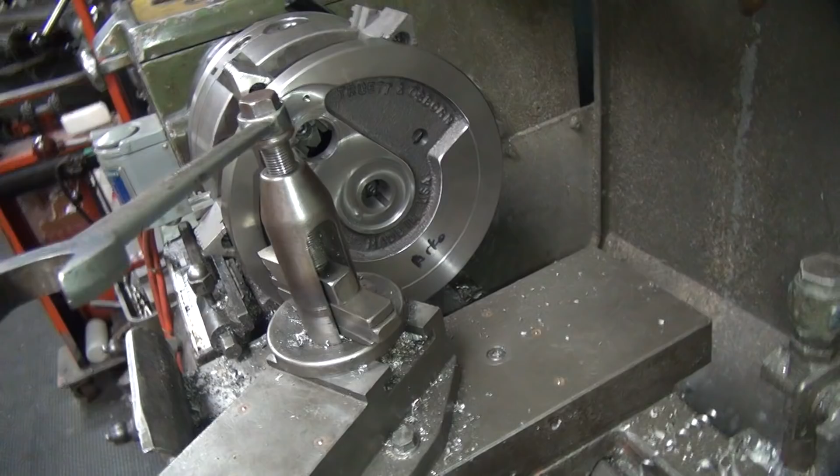Alright, working on these Stroker 45 motor here again. This is Mike's flywheel. So I just got done cutting the washer hole out in here.

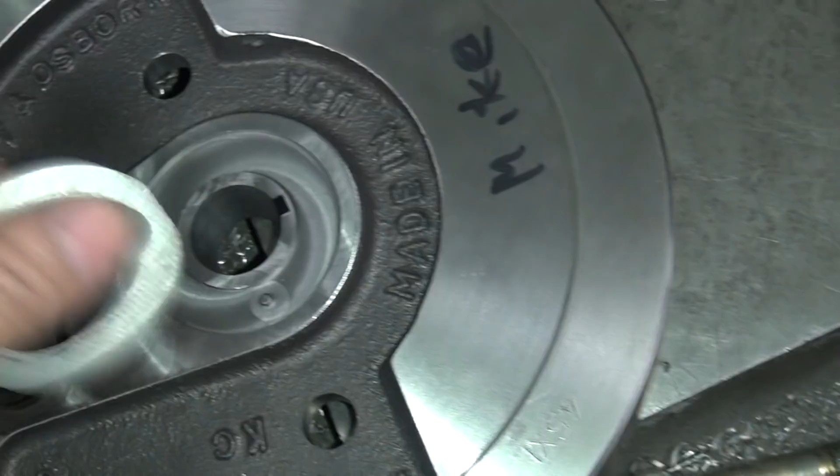So here is the uncut one. This is where the stock Harley thrust washer goes to. So this is the one we're putting in there. And as you can see, it doesn't quite fit. So it's a little bit too big, so I can open them up a little bit. So that's what we're doing over here.

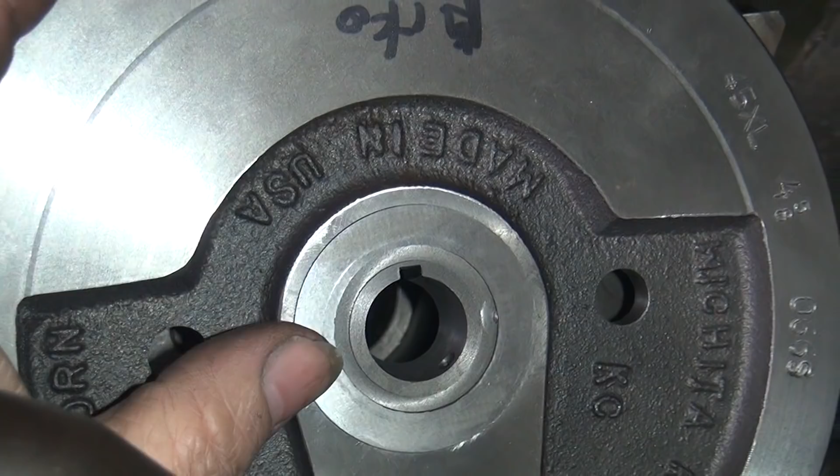Now, we still got to deal with the dowel pinhole I haven't put in here yet, but anyway, that goes right in there like that. So it fits up in there now. Only got about 2 thou clearance on this. It's trying to go in there, but not quite because the washer's little dowel pin is in the way.

So I'm going to have to put the dowel pin in these holes, into these washers, which are heat treated. So I have to use a carbide drill. That ought to be fun. That'll be the next thing to figure out how to do.

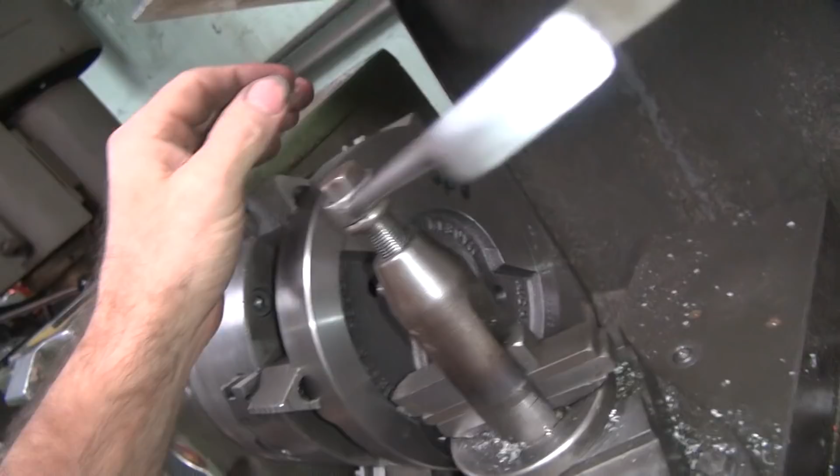So yeah, that's it, this one's all done. So we're going to go ahead and do another one now, so you can see how we do it.

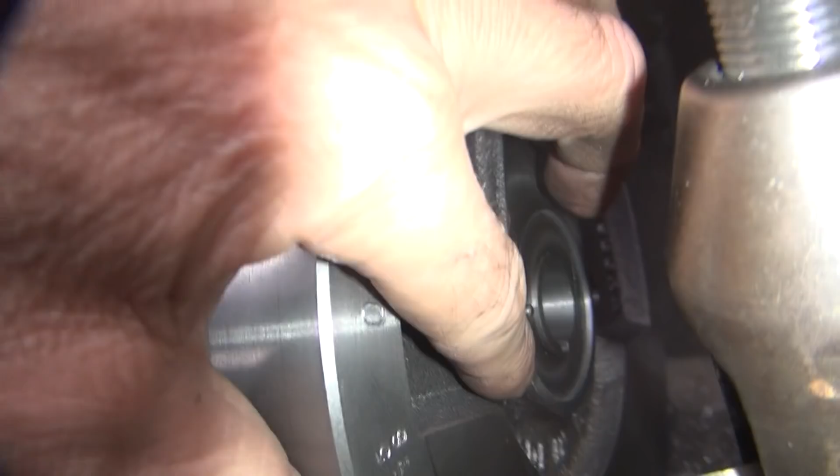This is our depth stop down here. And this here is the special bit I ground that gets me up in there inside that hole where it's real nice and tight. You got to have it undercut here to clear the diameter of the cut in there. It's hard to see it, but anyway, the cutter has to clear that diameter.

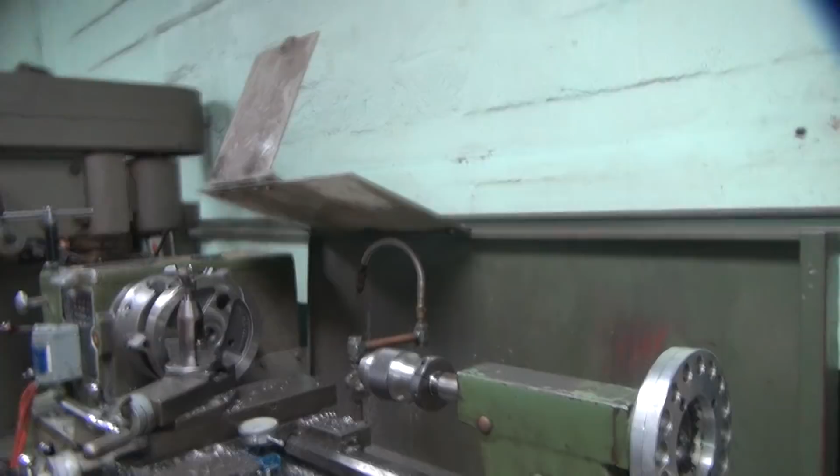So anyway, it's all fun stuff you get to play with. You have to make everything. What else is new?

Okay, so I'm going to try not to disturb the setup here too much. Get this out of the way so I have room to work.

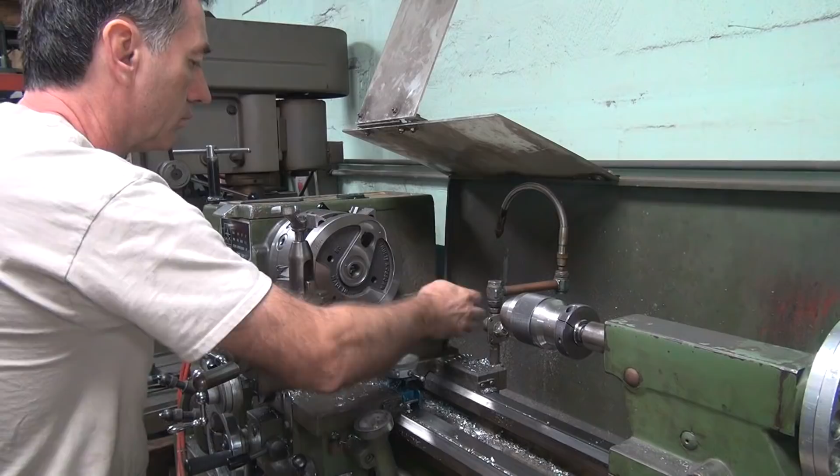Alright. Now I'm using a 6-jaw chuck. This jaw doesn't do anything, it's not hitting on the flywheel. The other 5 are doing something now.

The right direction would help. Alright, one down.

Use a lead hammer to just knock it in flat. It's basically a dead blow type thing with a lot of mass behind it. That's why the lead works so good. Looks good on a lot of things.

Okay, we use our dial indicator here to make sure this thing is straight. Appears to be nice and round, or concentric I should say.

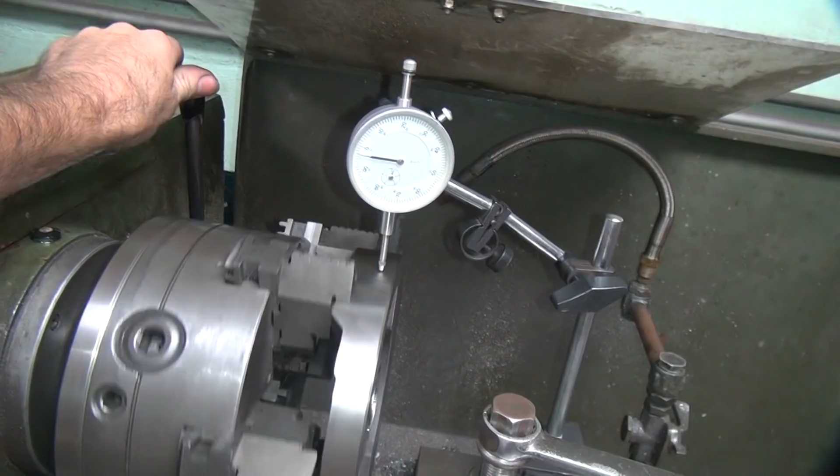Okay, the needle right here is not moving, not much anyway. It's at about 3/4 of a thou. I had to recenter up my chuck jaw to make that do that, on my chuck. I have a chuck you can move side to side. It was 10 thou out when we started with the other wheel.

Alright, side to side is usually within about 1. That's what we had before, so I'm going to check it again. You can just eyeball it to see it's not wobbling around, so that's close enough usually, just for this application.

Okay, now we can move this all the way in here. We'll redo this.

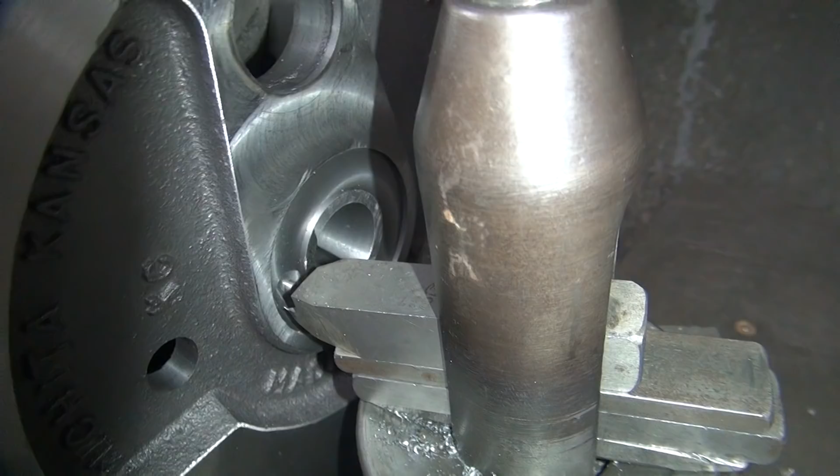Alright, so the fun part about this deal was you have to clear the dowel pin. It comes around right like that, and it goes clunk right into your cutter. So you have minimum clearances in there.

So I go into, that should be close to 0 if the flywheels are the same. So you can see how close the dowel pin is. I purposely cut the cutter really thin, so I actually have quite a bit of clearance.

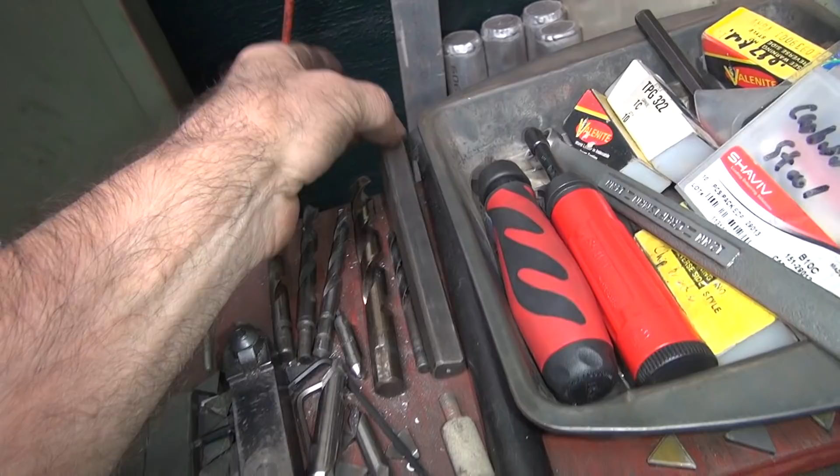But that is a problem. If I just use a regular boring bar, like one of these, that dowel pin will go clunk right up against this thing and destroy it. Or it'd cut the dowel pin off. If those are soft, it'd cut it off. If they're heat treated, it would break this, and screw up the dowel pin and the flywheel.

So that's what we had to do. Okay, so now we'll make sure everything clears, which it seems to. Okay, we move this in here until it touches. You'll hear it.

Okay, looks like we hit right there, about one under like before. I hear it hitting. Now we're cutting the washer, it's bigger now. So we're at 30.

Each line is 2 thou. That was 10, 20, 30, 40. We feed it out.

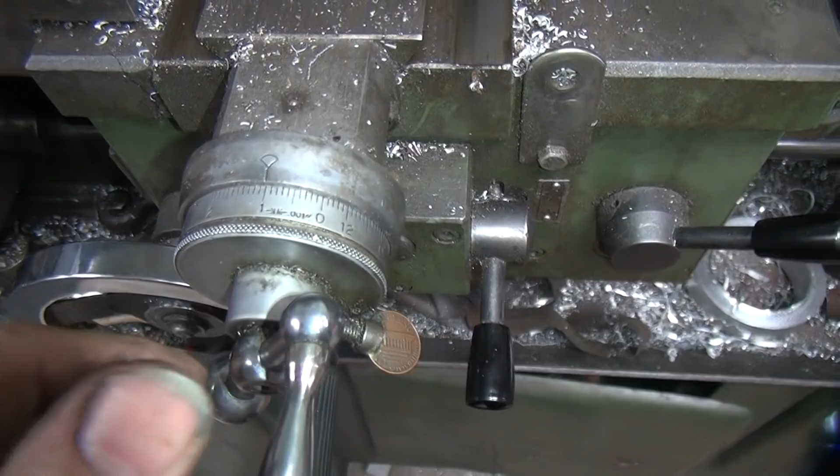Got that far. Alright, so now we got to run number 1 this time. Before I was going to, should have been about 0, but I went a little bit past. Things keep moving a little bit. Okay, get this out of the way. Crank, crank, crank, crank. You get room in there to get with your caliper and measure it.

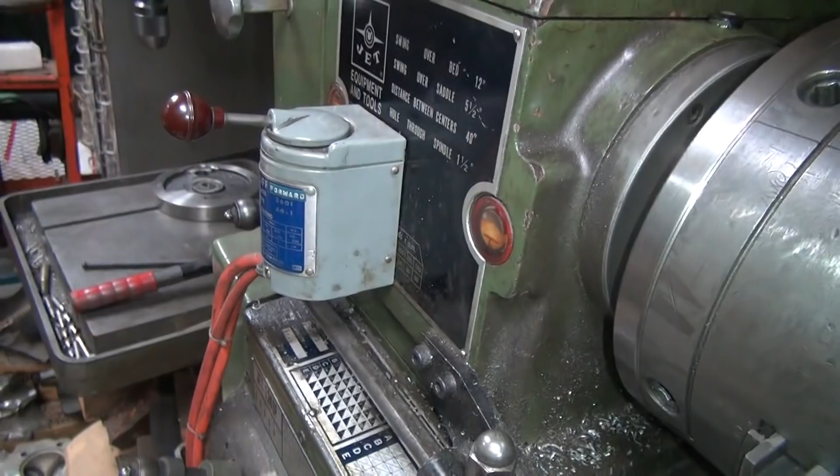Let's see what we got. We're at 2 inches and 6 thousandths. There's 7 thousandths. Okay, you can see that little mark there where I just cut. It's on the outside edge there, about 70 or 80 thou right there.

That's where we just opened it up. Okay, so the washer is 2048 to 2050. We're at 6 or 7. So theoretically, we have another 40 thousandths to go, a little extra. That'd be more than we had over here before.

Okay, get that in there. Make sure you do clear the dowel pin before you come in. We know this little past 0 is where you hit. Turn the wheel off. Okay, make sure the dowel pin clears right there. We are, so we're good rotation.

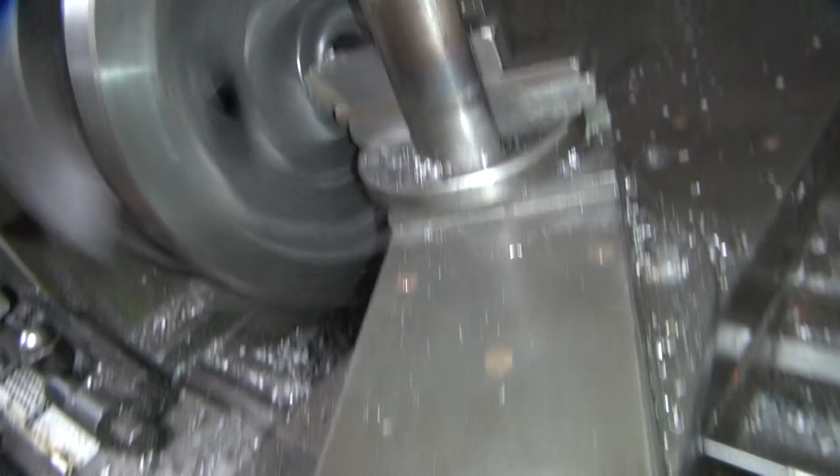We'll go 1 under on the dial right there. Let's see what it cuts at this time. We were at 1 before. Yeah, it's repeating this time.

Okay, so we needed how much? 20? No, we needed a lot. Yeah, I lost track. 50, I think. 20. Theoretically, we're at 30.

Everything out. Let's go measure what we got. It's a good thing we didn't go any extra. We're at 48. 49. That's the same thing I did on the last one.

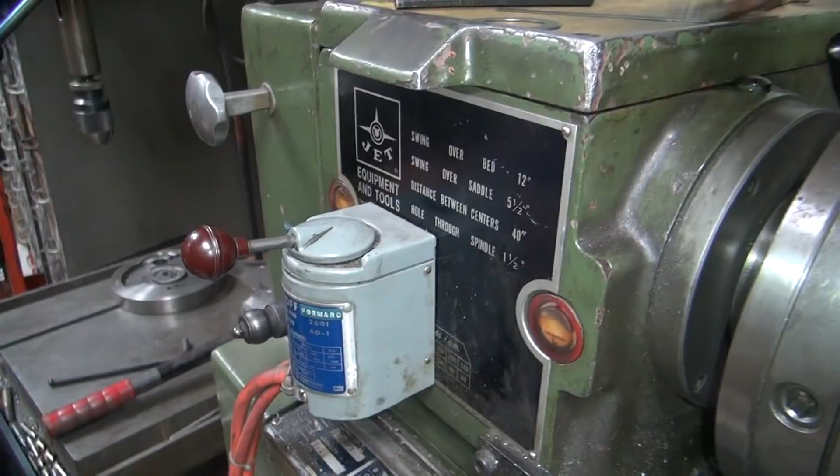It's at 49, and I wanted 50. To get 50, I took 2.5 out. Okay, this time we were at 5 under.

So this lathe does not repeat on these numbers, which is kind of disappointing. Because it means I can't use it. My guess is this cross slide's moving around a little bit each time I do this. Okay, we should clear. We're good.

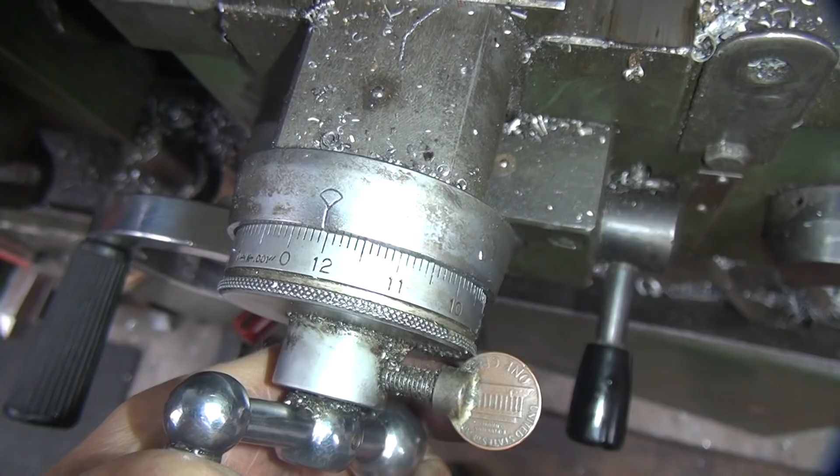1 under. Zero. That's where I went to before. Theoretically, that should be around about 1 thou. I'm going to give it the whole. It's exactly the same number I had before.

See it's cutting. Looks like it cut a couple thou. Yeah, we'll see if it cut a couple thou again. We're not cutting no more, so I'm going to run this thing way out.

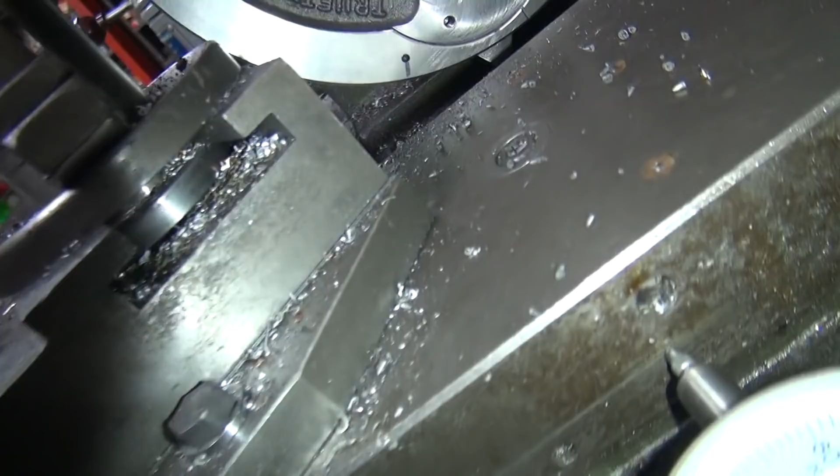Alright, turn that off. Give it a blow job, high pressure. Alright, let's go see what we got here.

50.5. Good. Oh, there's the 51. I was shooting for 50.5. Yeah, this caliper sets a little bit off on the OD. I think they're off by 1 thou. So actually, 51 should be about 50. Okay, so I think we're good on that.

The washer is 48, as I recall on this washer. And it appears to be fitting in the holder. It's supposed to, minus the dowel pin, of course. Alright, so there's another wheel done. Now I gotta deburr it though, because I hate burrs. Burrs are bad, we do not like burrs around here.

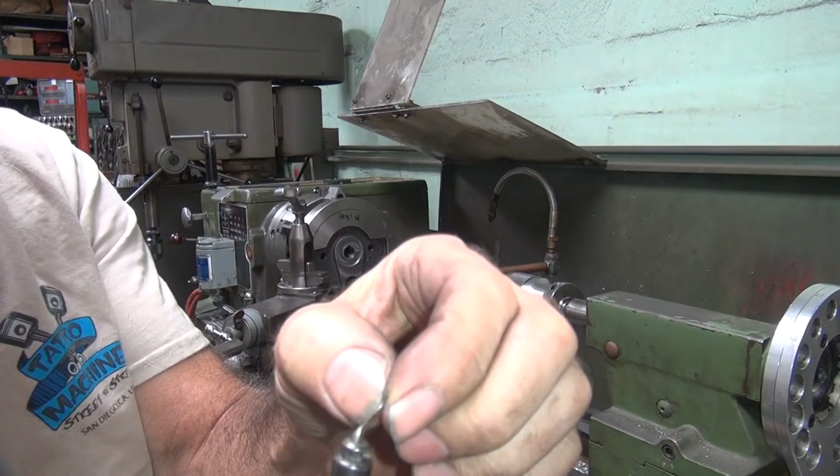Alright, so I'll use this one here because this one's ground right to the point, right up to the tip. This one here, Fancy Nancy one, it's radiused all the way down, so the first 1/16 of an inch doesn't do anything. So I use my modified one, which is dull.

One deburred edge. Can't have any burrs on anything I do. Cut me. So you see a little shiny mark right there in the corner. Right there, that would be our deburr. This line that's coming out right here is what we just cut. So that's how much bigger we made it, roughly. Alright, so now that has been modified.

Okay, grab our tools here. Okay, so now we can see a little bit better what's going on.

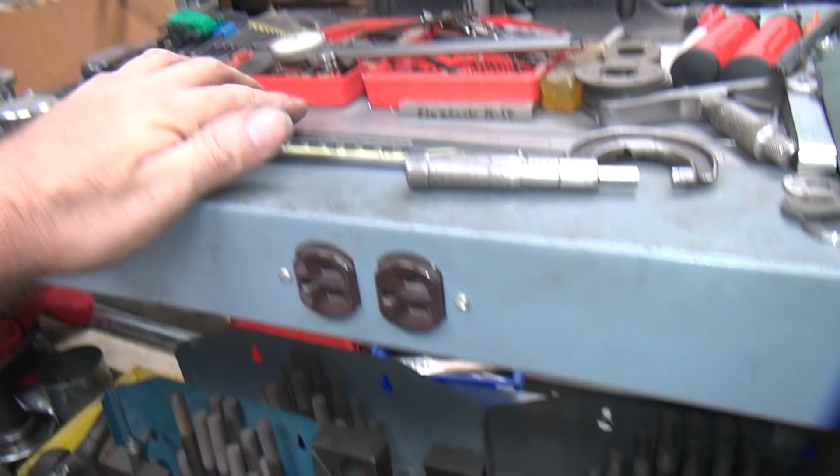I kind of got an idea what I'm going to do. Basically going to use the milling machine over here. We're going to dial indicate in the center of this, move over here and measure what the center line dimension is exactly on center to what that is. I can roughly tell what it is with a scale, which is over here right now.

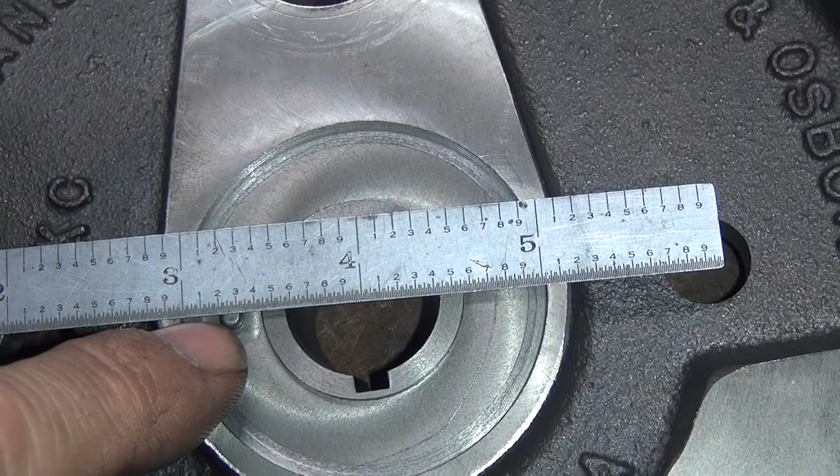So if you take that and put it right in the middle, and look over here where the dimension is at, you can see from the 4 to here looks like about 730 thousandths, roughly.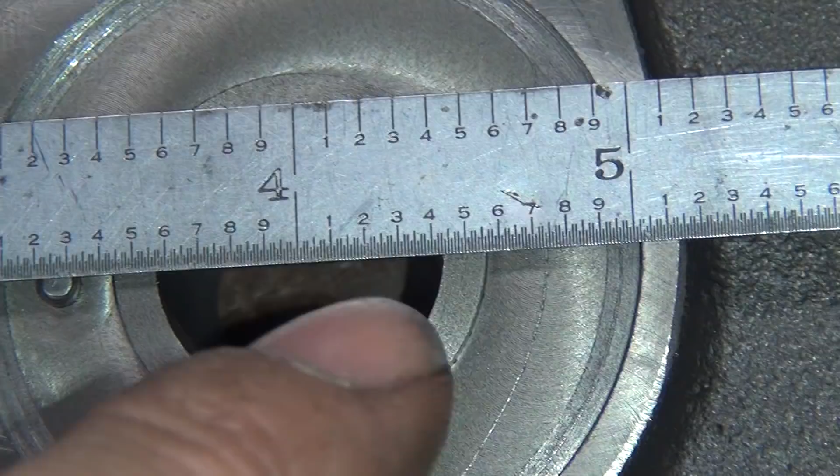Now to make sure this is on center, you look at both sides here. See, it's 4 plus a little bit, 4 plus a little bit. Looks like I'm maybe slightly more to the right here, which will give me about 5 more thou over here. So maybe around 740 then instead of 730, 735. But it's not 3/4 — 3/4 would be 750. That'd be too easy. That's why we're going to actually measure it in the real world.

Then I'll go ahead and put this into the mill and somehow hold this, probably just using a 3-jaw chuck would be my guess. Then I'll have to indicate the center of the hole, which will put me on center again. And then I just move the mill over and poke the hole.

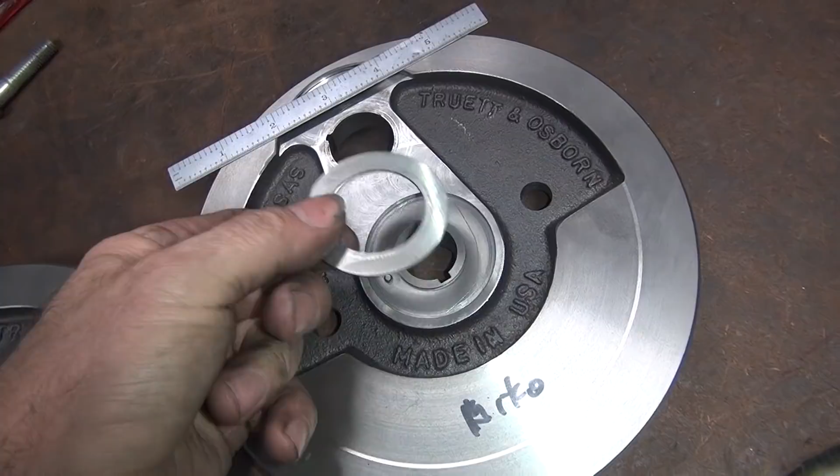I'll have to find me something hard, carbide, some type — something I want to destroy. Because it probably won't be too happy drilling through heat-treated washers. But anyway, that'll be something I'll have to figure out.

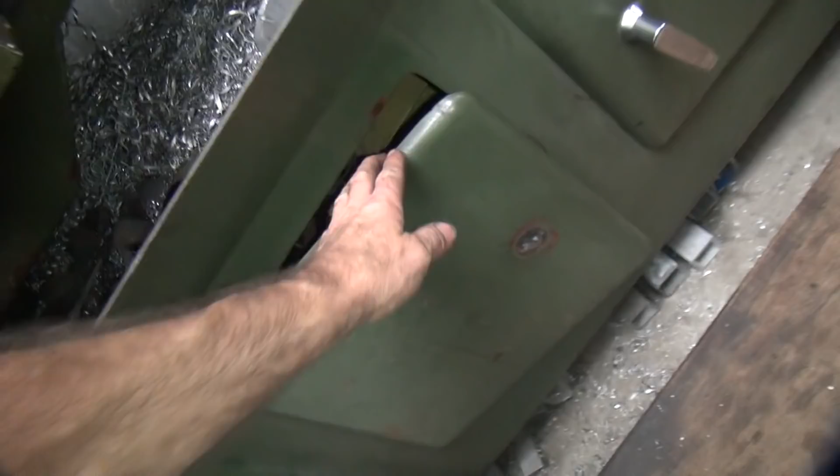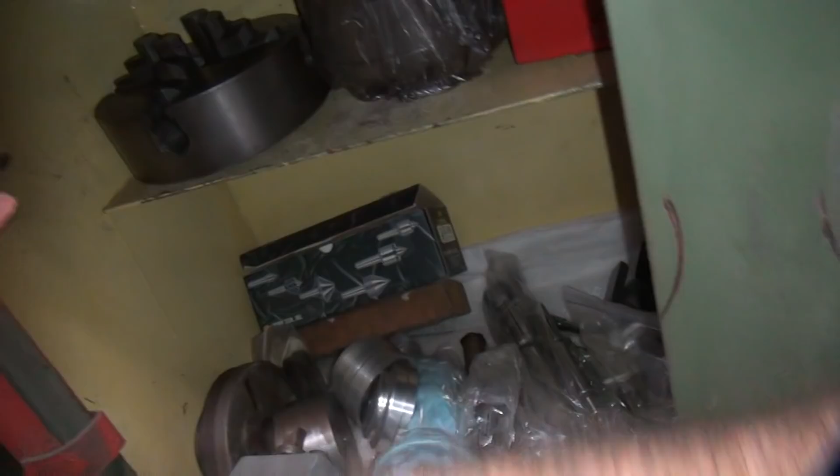So I'll have to go find me a drill chuck to use. I got a pretty good idea where one's at, right over here. Yeah, there's probably one floating around down here somewhere. I used to have a small one. I don't see it right now. It's buried in here somewhere. Yep, it disappeared. Or it's buried where we can't see it.

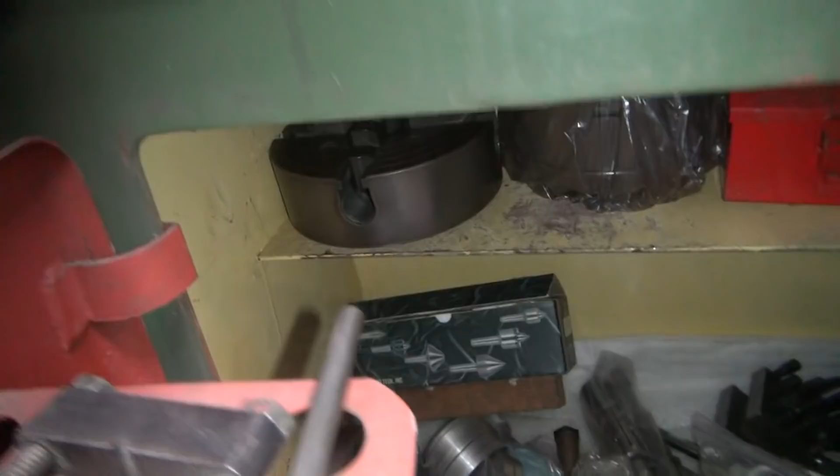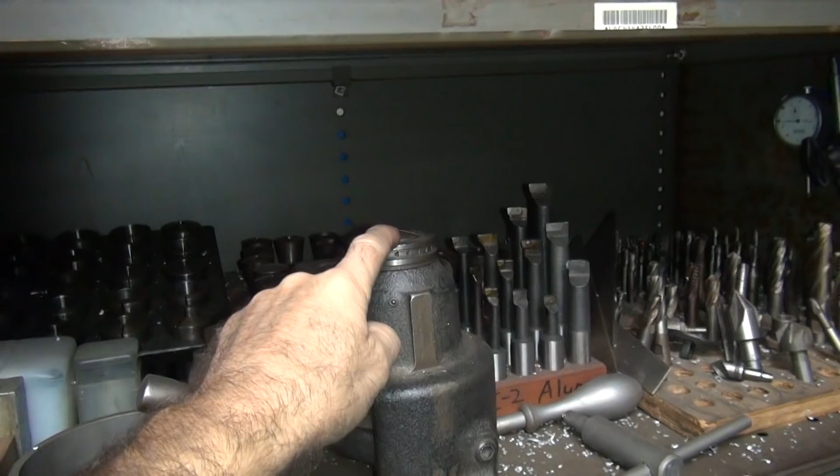So that'll be the next thing to figure out on this motor. That'll be something to do on another day. It will not be today.

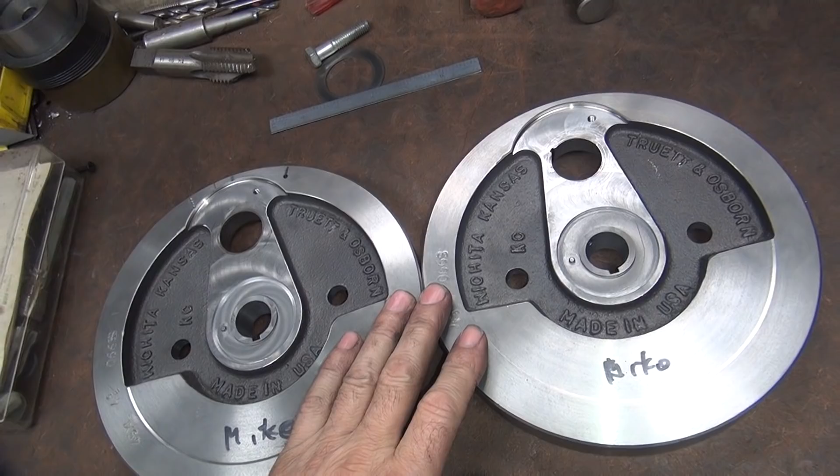And so these ones are pretty much ready now to mock these up like we did the other motor. I have to go ahead and rebuild the crank for him now, when I get the flywheels more or less done.

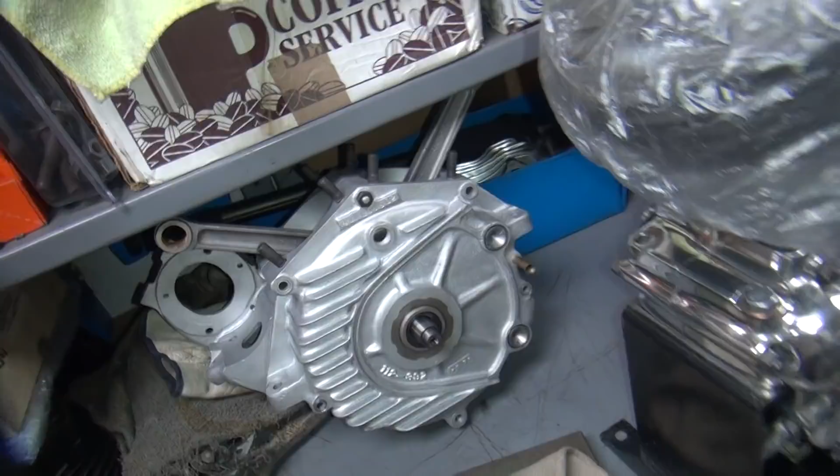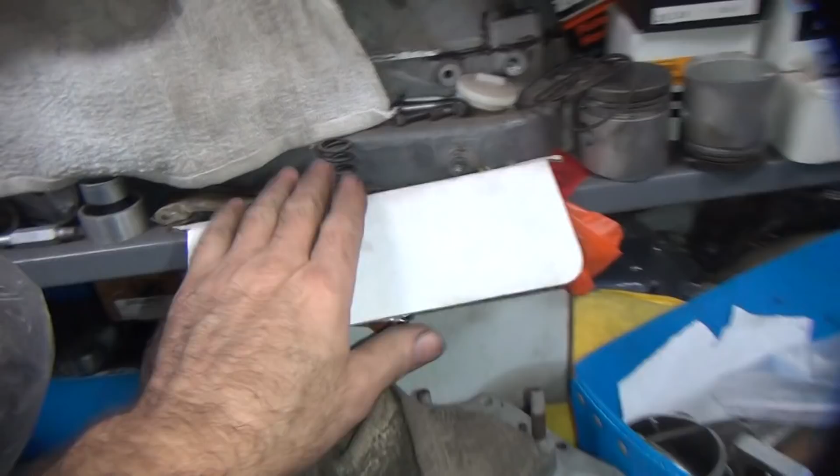We'll have to make up another motor like this. This is motor number 2. We gotta get motor number 1 done — motor number 1's over there. So let's get some more parts here to do another motor. Oh yeah, we already did them — right here, more parts, rod set, all that. So that'll have to be rebuilt. That'll be something we'll do again another day, not today.

Now we got to take that one apart so I can cut the flywheels. So that'll be the next video. Alright, that's it for now.

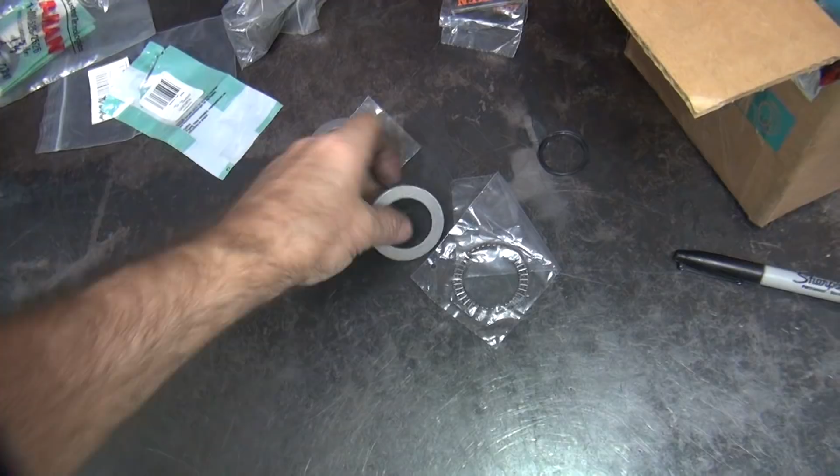More junk. Oh, here's what the washers look like that we're using. Here's a whole stack — these come in different dimensions. There's a 30 thou one, there's an 1/8 inch one right next to each other. So anyway, those go on there, and this is how I get my roller thrust washer — roller bearing thrust washer for the crank. Makes these early motors live.

Alright, that's it for now.